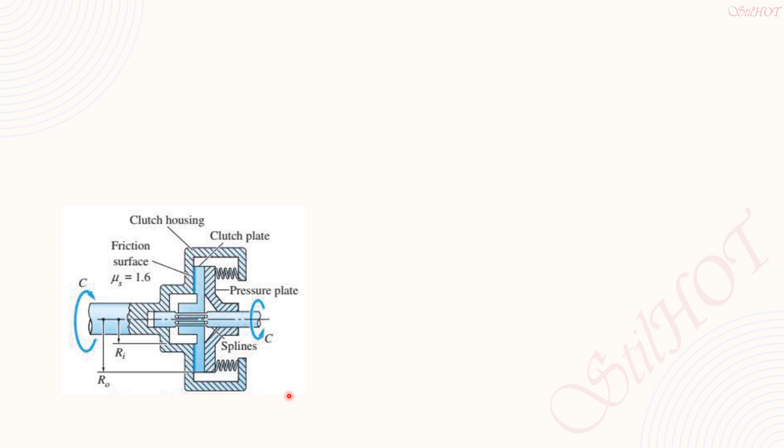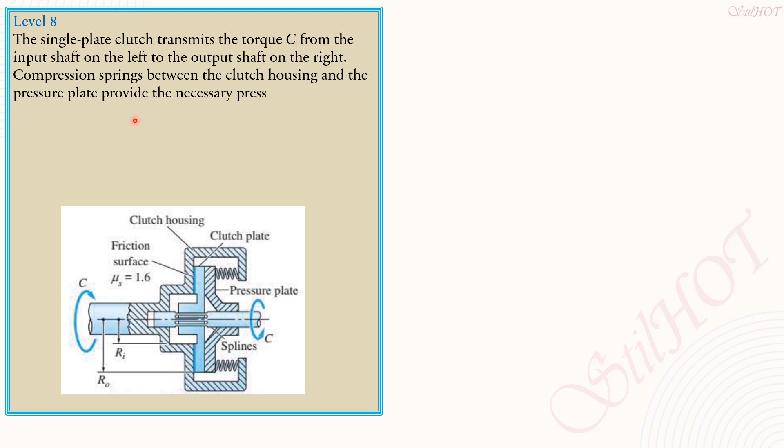Level 8. The single plate clutch transmits the torque C from the input shaft on the left to the output shaft on the right. Compression springs between the clutch housing and the pressure plate provide the necessary pressure on the friction surface. The splines prevent the clutch plate from rotating relative to the output shaft.

If R inner is 4 inches and R outer is 9 inches, determine the total force that must be applied to the pressure plate by the springs if the clutch is to transmit a torque C of 56 pound-foot when it is new. So here is the figure. Then this is the couple, mu sub s 1.6. This is the contact surface. RO is R sub 2, 9 inches. RI is R sub 1, 4 inches.

And the formula for moment or couple is 2/3 mu sub s P times the quantity R2 cube minus R1 cube over quantity R2 square minus R1 square, where R2 is R outer, 9 inches, and R sub 1 is 4 inches, R inner. And let's express the couple in pound-inch by multiplying this by 12. So formula first, then substitute.

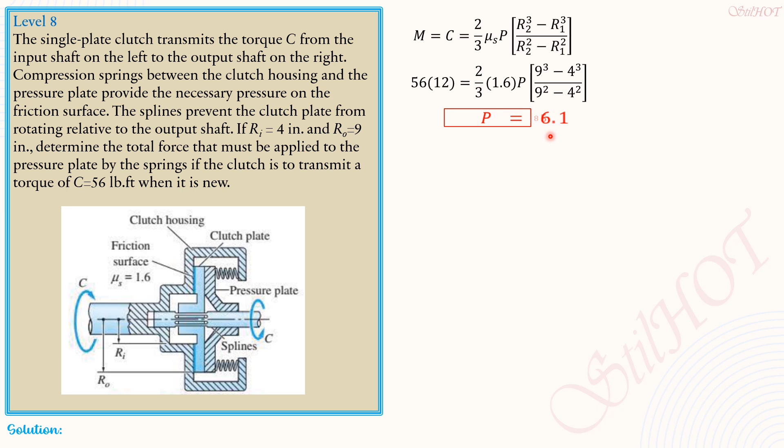So 56 times 12 equals 2/3 of 1.6 times P, quantity 9 cube minus 4 cube over 9 square minus 4 square. So solving for P, which is the only unknown, P is equal to 61.58 pounds.

Level 9. The disc clutch is used in standard transmissions of automobiles. If four springs are used to force the two plates A and B together, determine the force in each spring required to transmit a moment of 600 pound-foot across the plates. The coefficient of static friction between A and B is mu sub s 0.3.

So for the solution, again, the moment is equal to 2/3 mu sub s P times the quantity R2 cube minus R1 cube all over quantity R2 square minus R1 square, where R sub 2 is the outer radius, in this case 5 inches, and R sub 1 is the inner radius of the hollow disc, which is 2 inches.

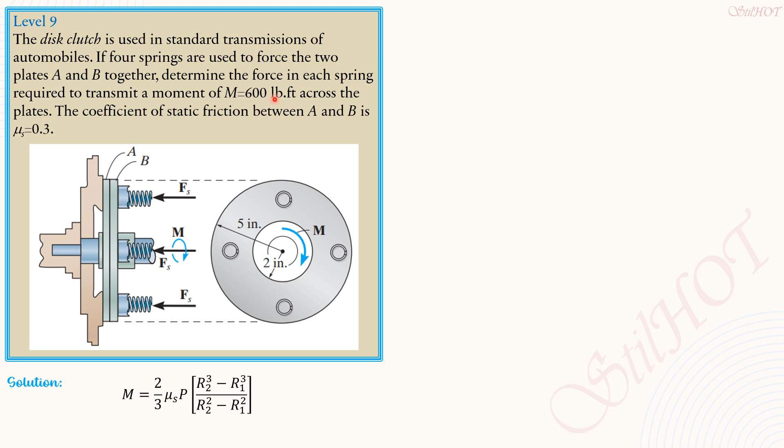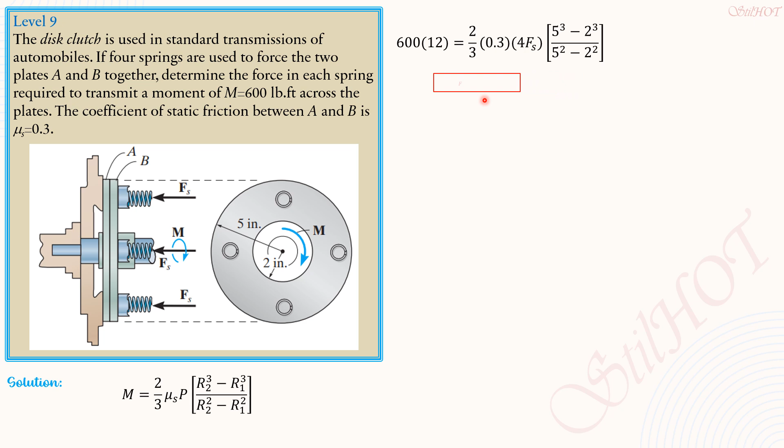Then since there are 4 springs and we are required to compute the force in each spring, we just substitute P equals 4 times Fs. So substituting with M converted to pound-inch by multiplying by 12 inches per foot. So 600 times 12 equals 2/3 mu sub s 0.3 times 4 times the force in each spring, quantity 5 cube minus 2 cube all over 5 square minus 2 square. So F of spring is the only unknown. Using your calculator, F sub s is equal to 1615 pounds.

Level 10. The double pulley shown is attached to a 10 mm radius shaft that fits loosely in a fixed bearing. Knowing that the coefficient of static friction between the shaft and the poorly lubricated bearing is 0.4, determine (a) approximately and (b) accurately the magnitude of the force P required to start raising the load. So here is the given figure. So for the solution, we solve for P approximately in part A, then accurately in part B.

So it means that the effect of this P here would be to rotate this double pulley in the clockwise direction, so therefore R should be just to the right of the center of the axle. And the formula for the moment is reaction times radius of the shaft, which is 10 mm or 0.01 meter, times, if it is approximate, mu sub s, because motion is impending upward for the 20 kilogram load.

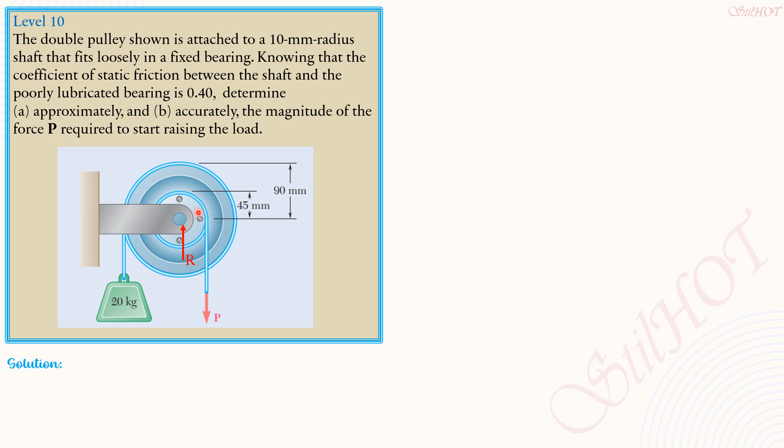So moment equals reaction times radius of the shaft times mu sub s, where R is from summation of forces in y, P plus 20 times 9.81. The moment due to P should be greater than that of the 20 times 9.81 newton tension. So the moment is P times 0.045 meter minus 20 times 9.81 times 0.09 meter. Simplifying, moment equals 0.045P minus 17.658.

Then for the reaction, summation of forces in y, R is equal to P plus 20 times 9.81. Simplifying, R is P plus 196.2 newtons. Substitute into the formula, with moment in newton-meter, radius of the shaft 0.01 meter, and mu sub s 0.4. So 0.045P minus 17.658 equals quantity P plus 196.2 times 0.01 times 0.4.

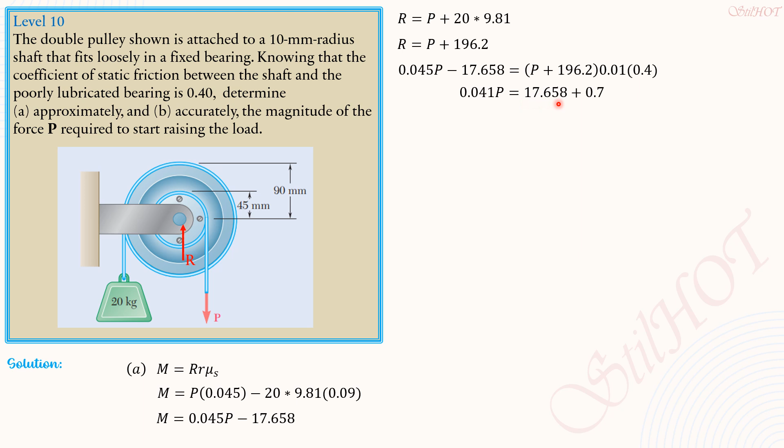So simplifying, 0.041P equals 17.658 plus 0.7848. Then we can now solve for P. P is equal to 449.8 newtons approximately. For the accurate calculation, we replace mu sub s by sine of phi sub s.

So moment equals reaction times radius of shaft times sine of phi sub s, where tangent of phi sub s equals 0.4. So phi sub s is inverse tangent of 0.4, 21.801 degrees. Then substitute into the formula: 0.045P minus 17.658 equals quantity P plus 196.2 times 0.01 times sine of 21.801 degrees.

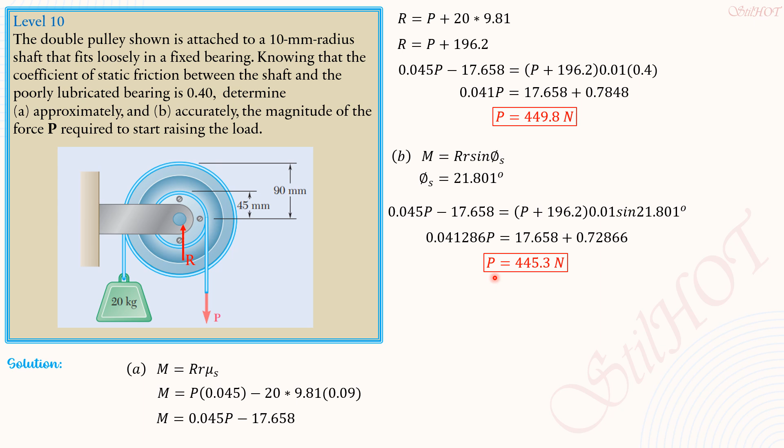Simplifying, 0.041286P equals 17.658 plus 0.72866. Finally, P is equal to 445.3 newtons, and that's the value of P when we use the accurate formula.